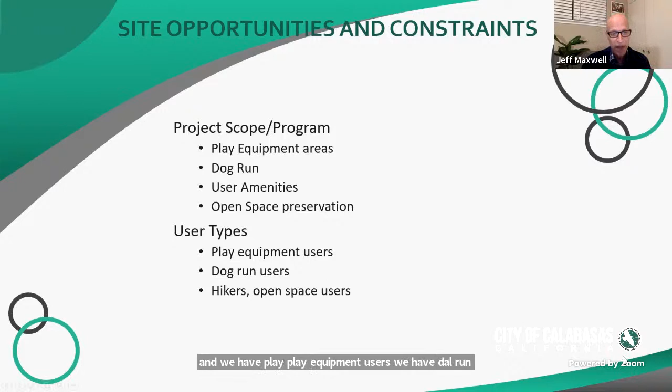Another part of the scope is to maintain the open space and the trails that already exist at the park. Other things we are thinking about are our user types: play equipment users, dog run users, and hikers and people seeking open space. We want to pay attention to all three different types of users.

One of the things we really have to be concerned about is the ADA accessibility requirements. Because our site is so sloped, we have to be very careful where we place elements, because we have to provide access to all of the elements that we're introducing to the park so that we make it equally accessible to all. So you'll see that this creates some constraints with where we can place certain items that are part of our program.

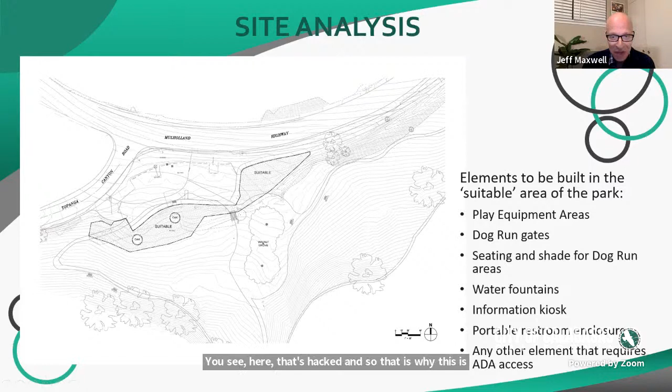I think we've come up with some good solutions though. So far, from our two previous workshops, we've heard a lot of feedback wanting a larger playground area, including shade, keeping the natural aesthetic of the park, and also having seating and picnic tables available.

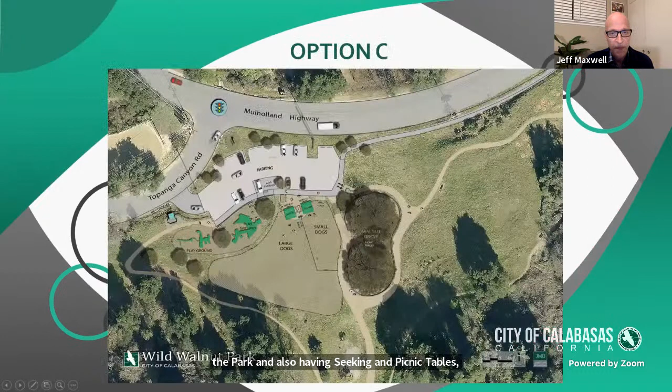So we're on option C. We had a couple other options previously that we've modified, and we're calling this option C. I'll let you all look at this and study this. The playground area is about a little over 5,000 square feet now, I think almost 5,500 square feet. It would accommodate whatever we select.

I'm showing here two at-scale large composite structures, and there could also be a few freestanding elements, whatever we select. We've kept the two oak trees within the playground area, and there'll be a couple benches and seating in that area.

If you move over to the dog gate area, we have an information kiosk there, a couple benches, and a water fountain. Not showing up very well in this image is a water fountain near the playground area entrance, kind of under that tree. So we have a water fountain at the playground and one at the dog run.

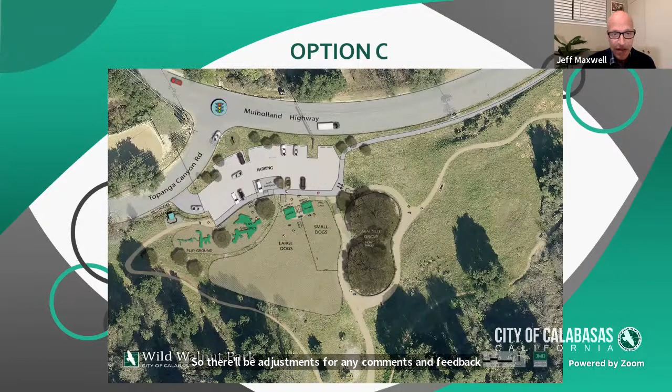Just to remind you, we're still in schematic design. We're taking feedback - this isn't a finalized plan yet. We'll go through design development and construction drawings, so there'll be adjustments per any comments and feedback we receive. So this is what we're calling option C.

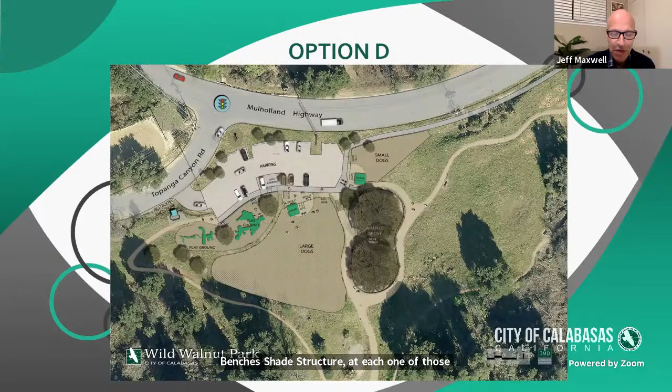There's a slightly different option D on the next slide. Option D is very similar, however now the small dogs and large dogs are separated. We have the small dogs in the area by Mulholland Highway. We'd still have an entrance gate, some seating, benches, and a shade structure at each enclosure. It just provides a little more separation, gives large dogs more dedicated space, and small dogs would be separated.

The playground is still maxed out - we've made it as large as we can without impacting too much with extra grading and excavation. The restroom enclosure is over by the playground, to the left of the site. That's the restroom enclosure - it would be a portable restroom serviced on a regular basis, but inside a nice enclosure. We'll look at that on some of these other slides.

So this is what we're calling option D.

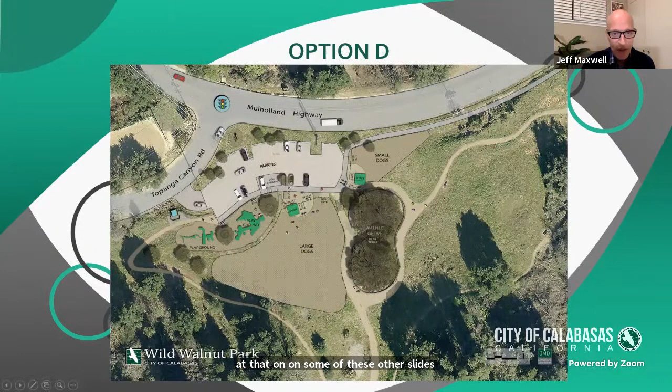Okay, and now let's talk about site amenities.

We'll have picnic tables and benches. Right now we are considering concrete picnic tables and benches. There were some picnic tables existing prior, and they've just been deteriorating, and I think they've been vandalized over time. So these would provide more permanency.

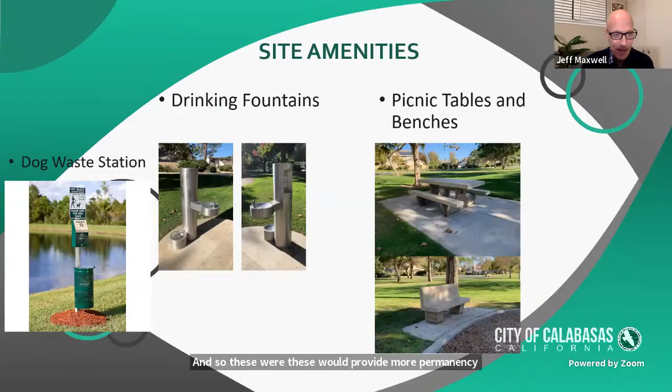And of course, we'll have dog waste stations throughout. Okay, next slide please.

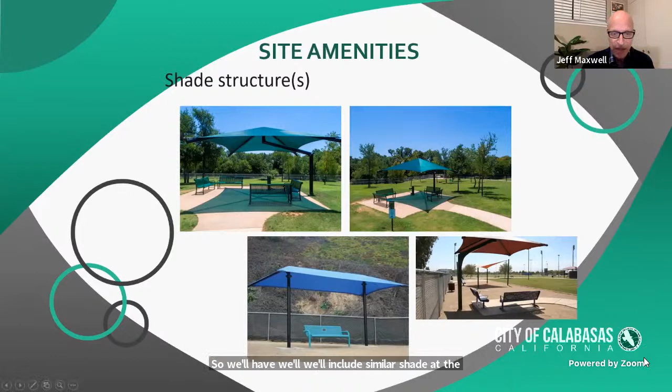So we'll include similar shade at the playground areas as we do at the dog run areas. Okay, next.

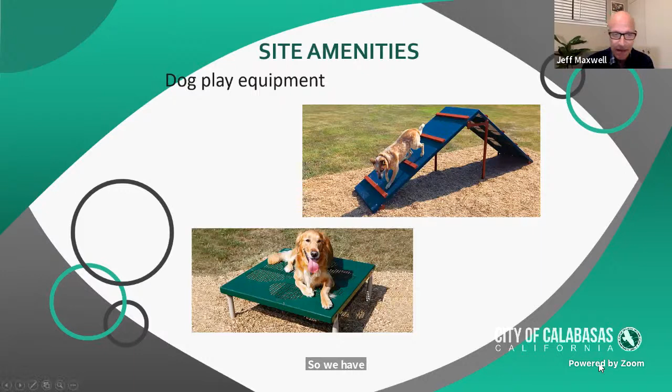So we have opportunities to add dog play equipment. There's various pieces that we can add.

Okay, and this is the portable restroom enclosure. Originally, our original design is similar to what's on the left, with a wood fence enclosure. It would have a door and a gate for servicing. And we're now considering, we prefer this type of enclosure on the right hand side.

It provides a place for the enclosures so that it's clean looking, but it's also a place where someone can't hide. There seems to be a little more safety with this type of enclosure. So that's the one we're considering now. We'll ask for your feedback on if you object to that, or if you still prefer the original design.